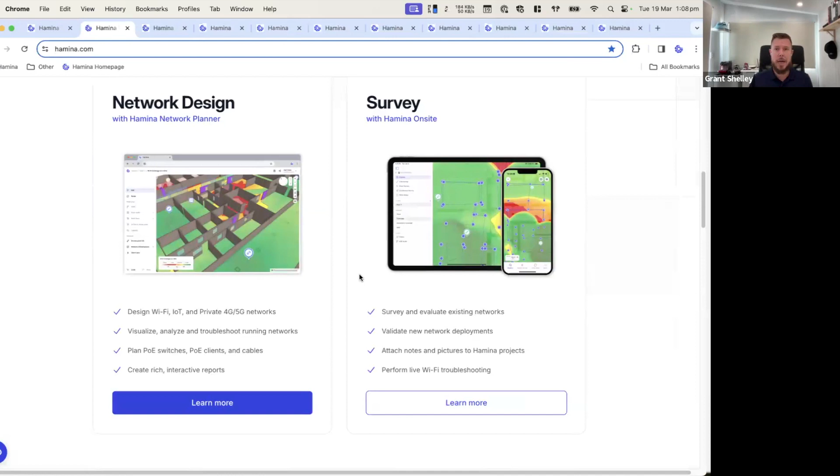All right, cool, let's get into the good stuff. We'll do just a quick little overview. If anyone is curious to learn a little bit more, literally everything's on the Hamina website, hamina.com, you can jump in there. There's little clips and videos that show you what the different products do, what you get with them. There's a quoting tool and all that kind of stuff if you want to look at prices.

We've got 2 products here, and then there's a sub product in the planner, which we'll start with. So basically Hamina Network Planner, as it states on the package name, is for all your network planning requirements fundamentally. It is a browser-based tool. I've got a whole bunch of tabs up here, so we'll jump into the planner in a minute. But basically you've got a standard version and a Planner Plus version. If we scroll down here, we'll show you what that looks like. One of the big things with the Planner is it's not like a traditional tool where you've got a DMG or an executable, it does run in a browser.

It runs incredibly well. I think a lot of people are surprised at how well it runs. It is purely cloud based, and even though I'm in Australia, I haven't really noticed any sort of latency issues or anything like that. So I don't imagine anyone else on this session is going to notice anything either.

If you're not 100% sure, you can actually sign up for a planner, just a standard light license is what it's called. That'll give you the option to use a predetermined number of walls and a certain number of access points - I think it was 4, as you were saying before, Haydn. But it gives you enough to get a bit of a play with it, to understand what the technology does. You can do cool things like move the AP around and see the propagation, the heat map change dynamically as well.

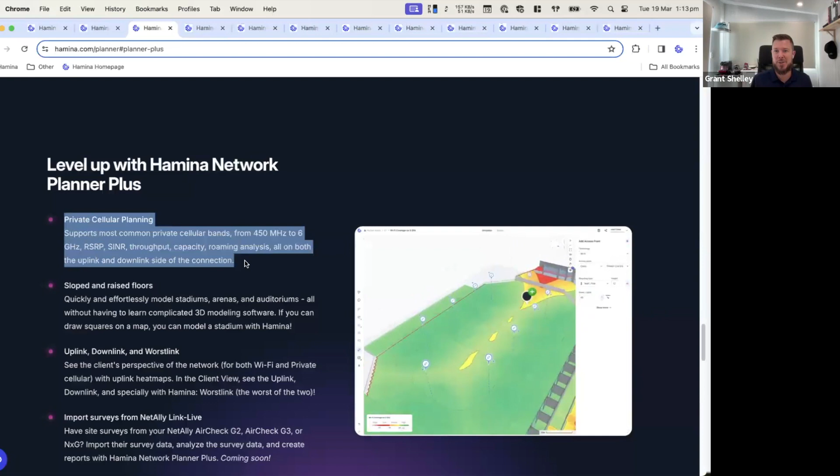Haydn, I'm sure you've been in plenty of examples where you've maybe been in a pinch, haven't had the right survey device, and needed to just do a quick scan with my MacBook, or I've got a G3 and I want to be able to do a quick scan on that. Being able to bring that into the tool would be pretty nice, right?

Yeah, definitely. I've had times where I've been out on site where I wasn't really expecting to need to do a survey, so I didn't have the survey tool, and to be able to use the internal adapter and still get some sort of heat map or data would be much better than - yes, I can use Adrian Granados' tools like Wi-Fi Explorer and that - but I still don't get the ability to get some sort of heat map if I do have to, in a pinch, give internal or external people a bit of a view of what's going on.

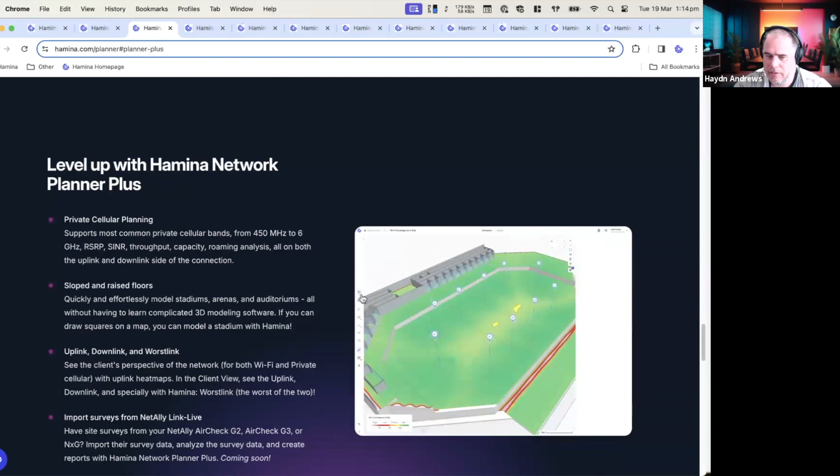And quite often, like you said with NetAlly, quite often I've got the G2 or G3 for potentially more the spot checks where I was just going out to check something, but the ability to feed that data in is going to be awesome. Yeah.

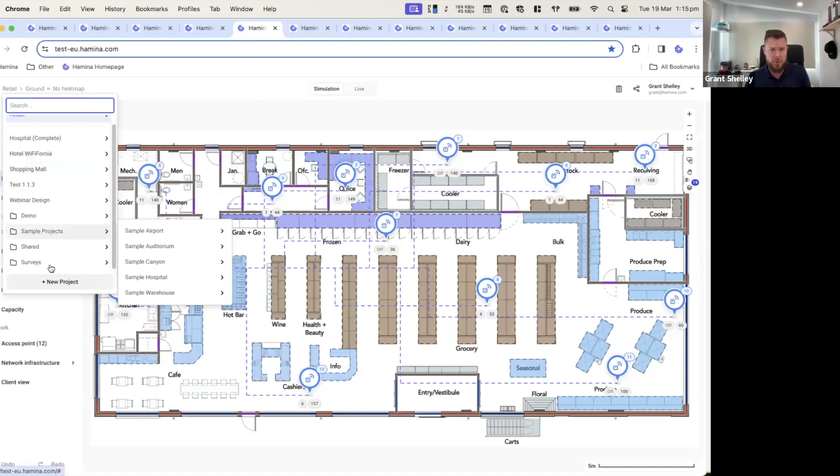And then let's jump into the tool. So the first thing you'll notice, I've got all my different projects here. I'm going to start and just create a new project from scratch. I think we were talking before about what are we going to start with - I've just sort of landed on a hotel environment. And so you'll see here, we've got the environment here. Basically, if you determine, depending on the environment, you can basically start placing APs based on the environment, and the software will do a pretty good job of giving you the right propagation without having to actually add any walls or anything like that.

But of course, if you do want to, if you do start to add walls and things like that in there, then basically the software will revert to free space path loss instead.

So you just need to drag and drop a floor plan in. I'm going to drag and drop a PDF into this one, and it'll take a minute. You can see it's in the middle of an upload here, having a think about it, so it shouldn't take too long. I should note this is a multi-story PDF as well.

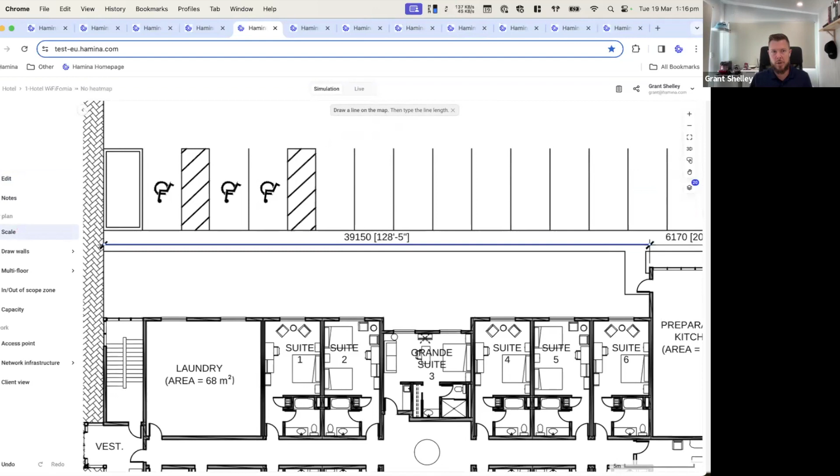First thing we're going to have to do is add a scale, so I can just zoom in here, scroll in with my mouse, click, and then we've got a 39 meter thing, right? Pretty straightforward. Now I can go in and just do the manual wall drawing. I've got a whole bunch of walls here, and I can add or modify walls if I want as well.

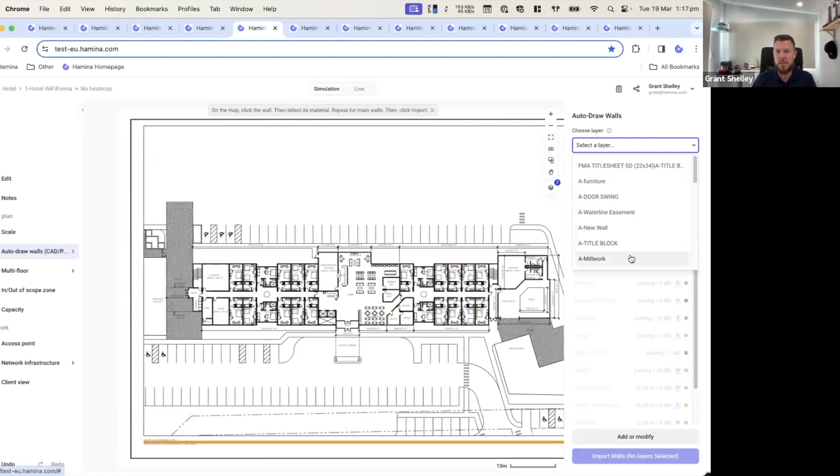But because it's a PDF, I can actually select the layering. I'm sure a lot of people have maybe seen something like this before. I can scroll through on the right-hand side and see all the different bits and pieces, or I can zoom in and click on some of this stuff. So I've got furniture, and I might just assign the furniture as the cubicle layer, for example. There's not really a right or wrong way to do it.

We can go through here and apply some of these, and you can sort of see as I define the different wall materials, they're highlighted in purple, and then the ones I'm actually going to change are highlighted in blue. So we'll go through here, and we've got just drywall.

There's only a couple more we need to do here. So we'll do some windows. Don't need to do any parking lots. Window.

We've got things like furniture and sinks and stuff like that, so fixtures. We've got the windows here, we can apply that as an actual window. Actually, we might want to make that a tinted window.

Now, the reason it matters whether I just set it as glass or as a window is that it will actually display as a window with a brick or concrete facade top and bottom as well, as opposed to if I just do glass, it'll be top to bottom, like a 2.4 meter high pane of glass. It may not be obvious in the 2D view, but when we switch into 3D, you'll actually be able to see the window with the other building materials around it, which is quite nice.

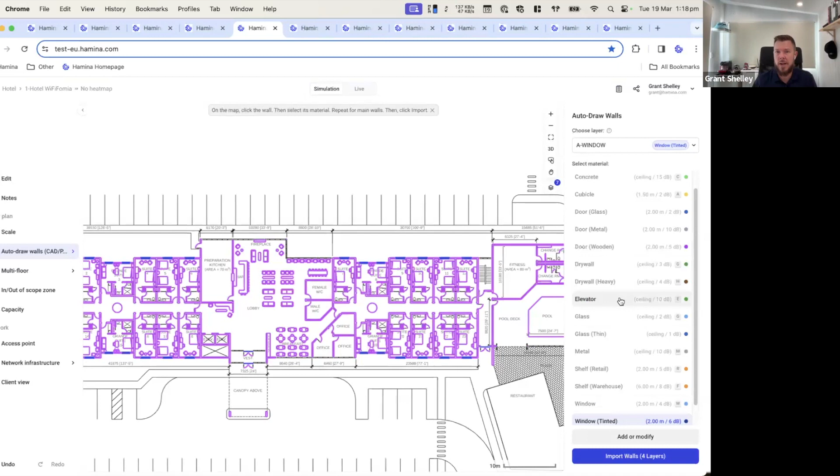And then we've got another entry for the door here, which again we can just apply as a wooden door. Now that looks pretty good to me. I think we've got this other one here - we've got the glazed glass.

So this one here, what I'm going to do is modify the glass itself. We go in here, select glass, duplicate that, and I'm just going to call this glazed. I'm going to double the attenuation, and then I might give it a green color. You can sort of see here, transparent in 3D - yes, I want that because it'll show up in the 3D view, show on the list, dynamic attenuation per frequency. I can do that, save, and then I've got glazed glass there as well, which I'll apply.

And then I just hit import, and it's going to import those 6 different wall materials. Does that pretty quick.

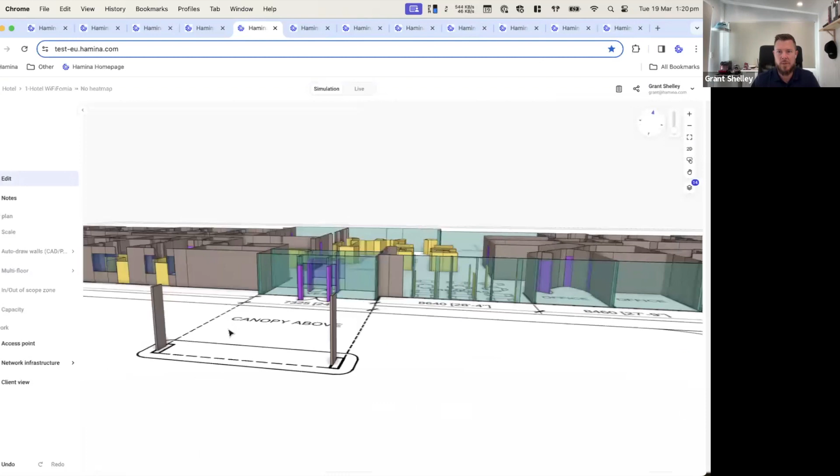All right, we go back to here, and we've got our design. It looks okay, we've got a little bit of color there, but once we go into actual 3D mode, you can see it looks a lot more impressive, which is quite nice.

Next step is just defining the zone, so what's in and out of scope. Again, this is all pretty straightforward stuff.

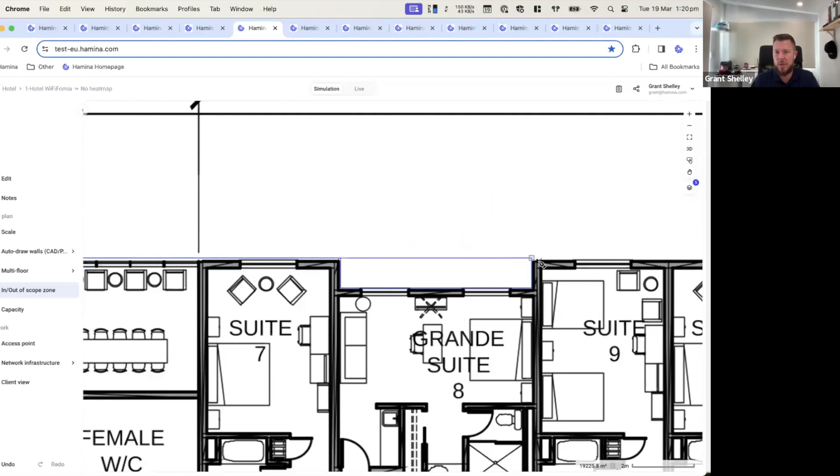Right, what you'll see here is that in Hamina, everything locks. So if I move the mouse cursor up, it locks to that other click point, which really helps when I'm going through here. It automatically locks to that point again, taking the guesswork out of having to click and do any manual work. It really streamlines it.

It's one of those things where Haydn and Michael, I'm sure you guys have done some manual plan stuff before. If there's any part of the software that can help streamline these types of things, which are often pretty tedious and a little bit boring, then you're all for it.

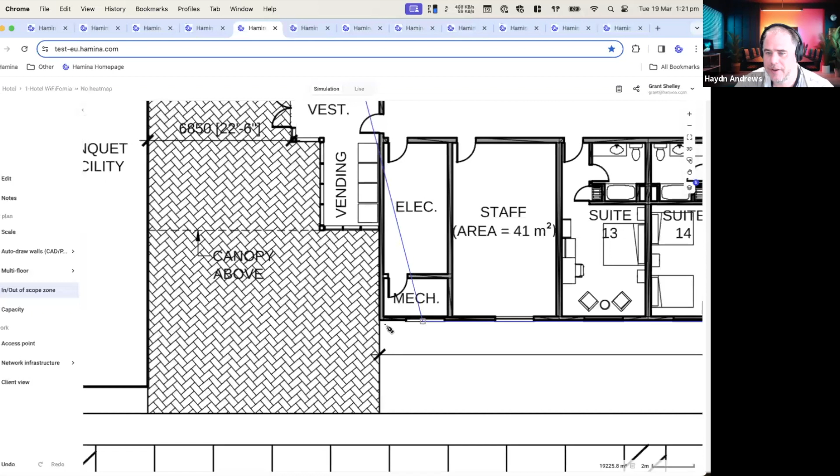Yeah, definitely, Grant. And the other one is, I can't remember what key it is because I'm using an external keyboard on a Mac and can't remember how everything's mapped, but basically you can press a button, and if you don't want it to snap to things, it won't snap to the lines, which comes in handy.

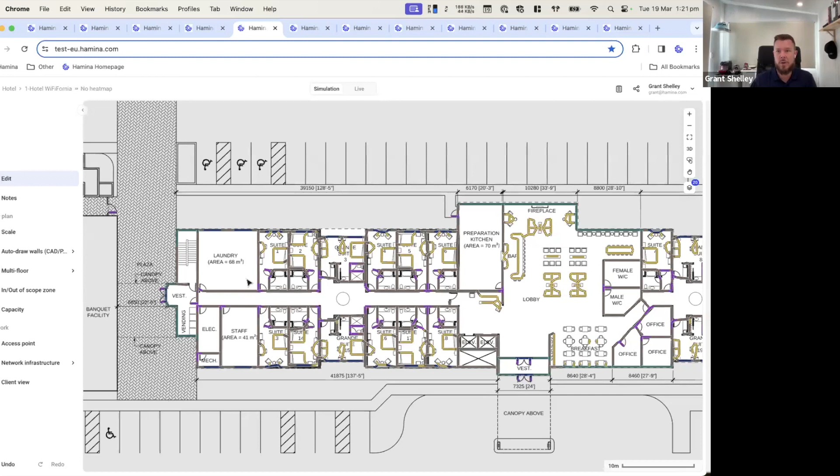Probably come in more handy in one of the demos you've got coming up, where it's got circular walls, where you don't necessarily want it to snap to anything because it's not straight. Yeah, absolutely. You can hold down command and get free reign rather than the snap angles if you want as well. So again, you've got that control over it.

All right, so now we've defined the area. We can basically start to go through with our AP style deployment. We can go through here. We've got Aruba, just at the top there.

Now, one of the other things we can do is, yes, everything is in 3D, but we've also got the 3D antenna view as well, which I find is really, really handy. You can see here, it depends on the AP type as well, which is quite nice.

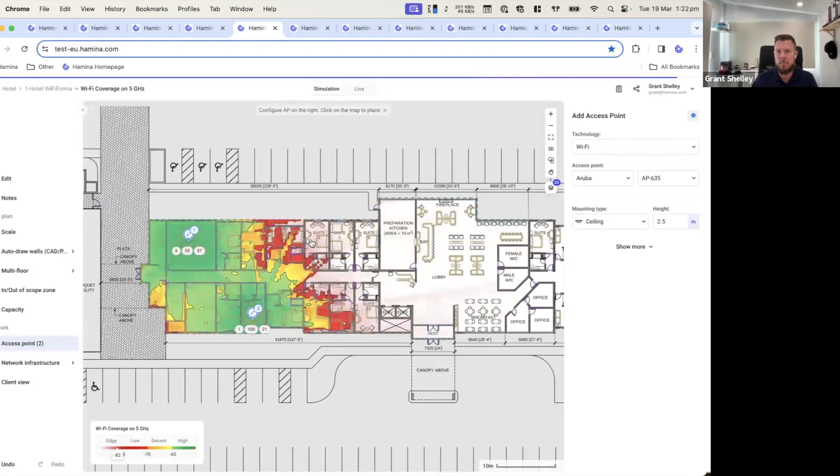So we can go through and pick our AP type. And then once we place the AP, it'll switch our coverage on. But then we can move that AP around, which is quite dynamic as well if we want, or we can just start clicking the other access points in the environment.

Right, and I think this is probably the more fun and satisfying part. For sure. And then we could do something here where, maybe for the pool area, we put an AP here that needs an external antenna.

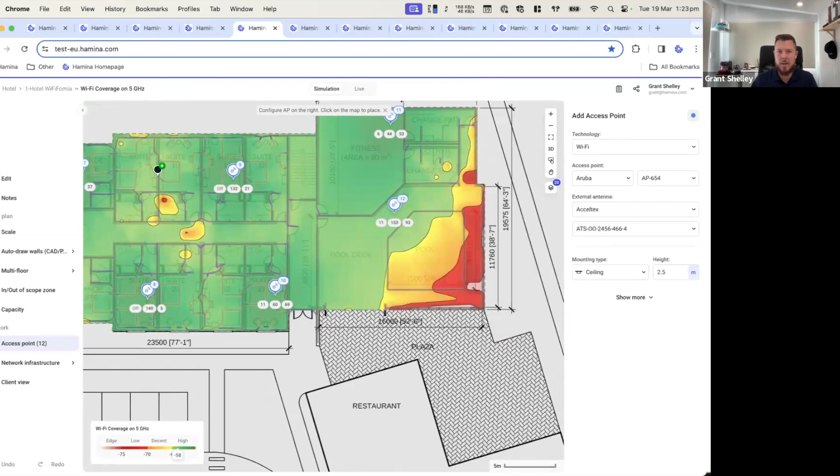And then maybe we choose the first antenna here. We click and drag and we can reorientate the antenna, so we've got a bit of pool coverage as well. So you can sip a mojito and still be on your phone with full coverage. And then again, we zoom out and we've got our initial design done there.

We do have a couple of visualizations as well, so we've got 2.4, 5, and 6 gigahertz. We've got our 3 channels there as well. The channel planning in Hamina is automatic, which is quite nice. Now you can go into a bit more detail here.

So you can disable unnecessary interfering radios. You've got some toggles there, automatic channel width as well, right? And you'll see here, because the regulatory domain was set to Australia, it did get the right channels, so we've just got the UNII-5 channels enabled as well.

And then off we go, and we'll get a little bit of an update there, which is quite nice. So I kind of like the philosophy of going as wide as we can until we can't, and then we can shrink it down. But then, of course, if the customer requires a narrower channel, we can force that as well.

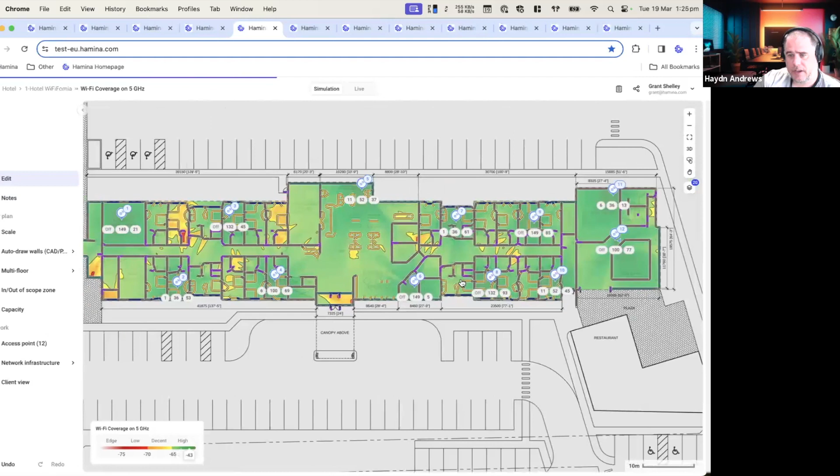That automatic channel planning, I've used that a bit to actually investigate, as I say, going the widest you can. I've found it works really well where you just keep dropping APs and watch the channel width slowly drop down in the tool.

So it's useful to get an idea of how wide I can go, so then I can marry up my network design to match what's actually feasible. There's no point trying to tell the wireless network to do 160 megahertz channels if it's just going to kill my system. And I've seen a few of the vendors, the best functionality doesn't always result in the best being deployed.

Look, I haven't run into any problems with it, but of course I work at Hamina. I'm not out in the field doing this sort of stuff, but I have put together some pretty large projects and haven't really run into any issues there. I'm not talking so much from the Hamina side, I'm talking more about using Hamina on that best channel plan to see what I can get, then I can adjust what I'm going to actually get on my wireless vendor's configuration.

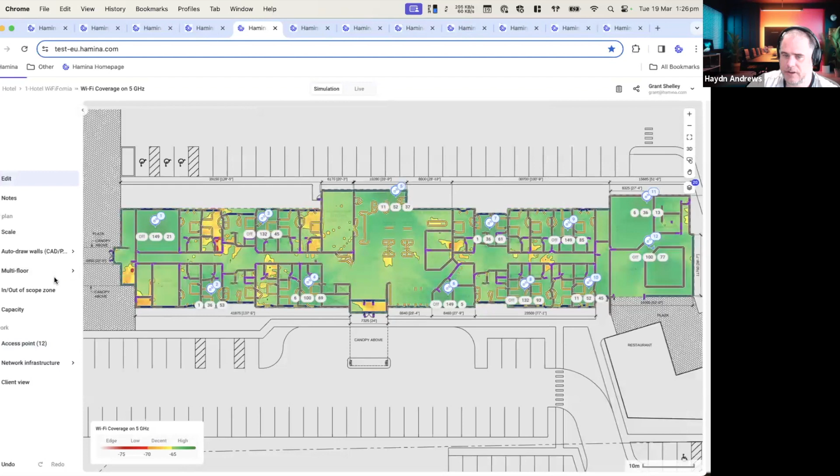I've seen some of the different wireless vendors, the functionality of best isn't always the best. So if I can look at it and go, well, there's no way that I can get 80 megahertz wide channels, but I can get 40 for this design, I'll hard limit it at 40 on the network side.

Those antenna plots that you see when you hover over, for anyone who's had to go and find those, sometimes they can be really difficult to track down. It's actually really convenient having it sitting within the tool, so you can get a quick visualization of what that antenna or access point's pattern actually is.

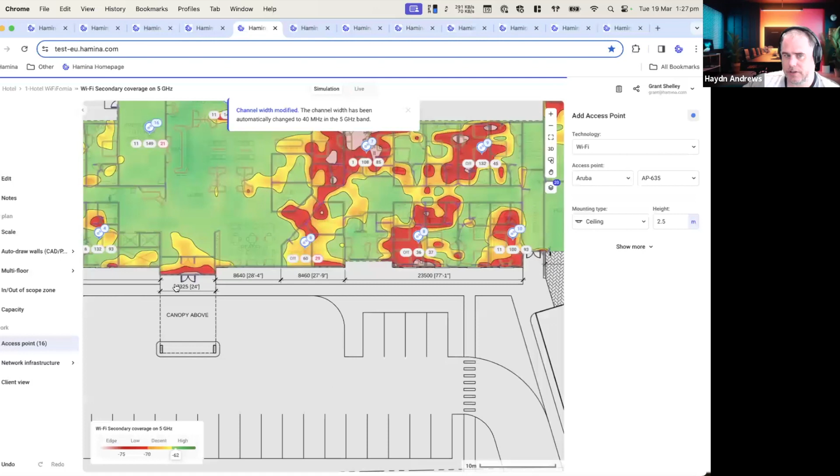Having it all there is a bit of a time saver. The other thing on that antenna pattern, having that 3D view is fantastic, especially when you're first starting in wireless. Trying to decipher the polar images is a mission and a half. Having a view that shows that it's massive and then it goes really narrow makes it a lot easier.

Or even to go, well, does it go out or does it go up? I've struggled with that in the past. You'll see people post on LinkedIn or something trying to understand as well. It's a nice little reference to be able to look at that, which I find quite handy.

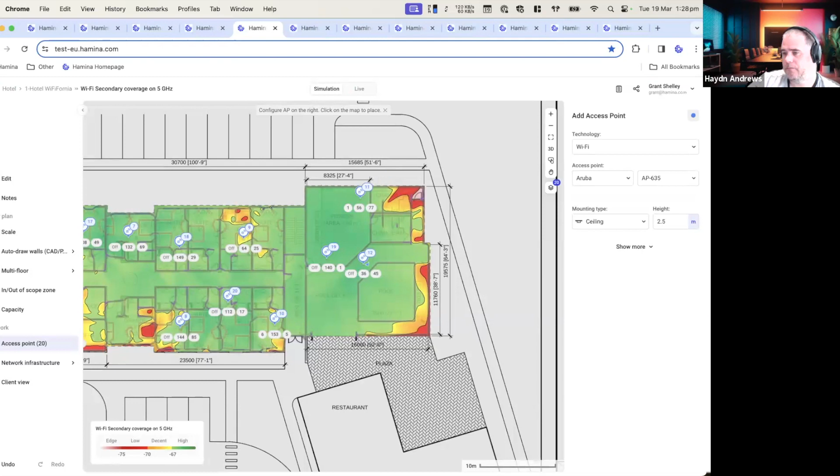We just had a couple of questions pop into the question and answer. The first one from Anonymous is, how many AP models do we have in the database? I realistically haven't found one that I've used out of the main vendors that's not there.

Correct me if I'm wrong, Grant, I believe there was something, if you've got the pro version, where there was an ability to basically work with Hamina to get an access point added. Is that still the case, or was that the beta-ish type era? I think that was a little while ago.

So if you want an AP added, it's generally a matter of send an email to support@hamina.com and we can get it added in. It's probably not about the number that we've got, because no one's deploying AC Wave 1 APs anymore. It's more about what are the relevant APs that you're seeing in the field, or that you're looking to deploy into the field.

So I haven't come across any, when customers ask us, hey, just checking, have you got this, have you got that? We do put them in the release notes as well. Joel's pretty good with putting what models we've got in there, what external antennas we're adding in as well. And we've got a really good relationship with the AP vendors to make sure we get them added in. So I'd be surprised if we didn't have an AP make or model that wasn't in there.

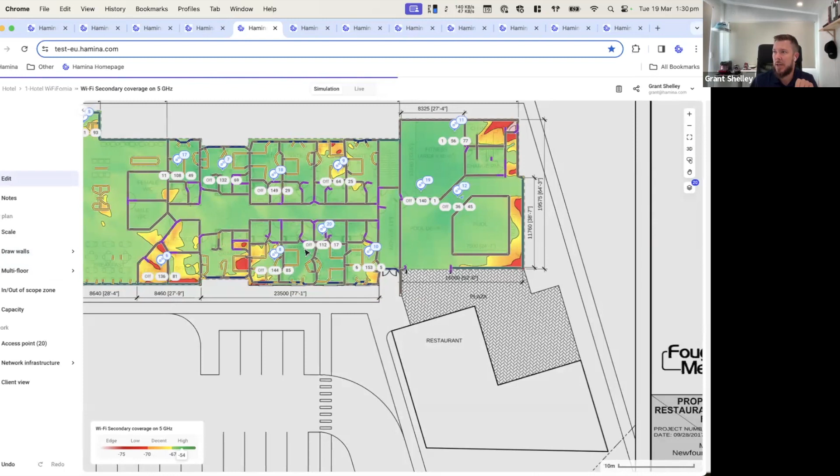And someone's asking about automatic AP placement, suggestion per floor or building. Not at this stage, but the fact that the placement is so fast. I'm not sure if we saw what I did before, but if I need to have secondary coverage, which is a pretty common requirement these days, I think I can see Michael nodding there.

That's a pretty good indicator for placement. A lot of the time when we're going through the automated process, at least what I've found, is you're generally having to section off areas and say, look, we can't place here, we can't place there. I've sort of just placed wherever, but I know I'm probably not going to place an AP in that stairwell unless it's absolutely critical, because of the cost, and it's almost a Faraday cage since it's probably double concrete and things like that.

And as you get further down here, you've got bathrooms which look to be a really good place to put an AP, because we've got this big wide area. But sometimes that's not necessarily going to be the case, same with change rooms and stuff like that. So the manual placement I find does the trick. That's my background, that's my preference.

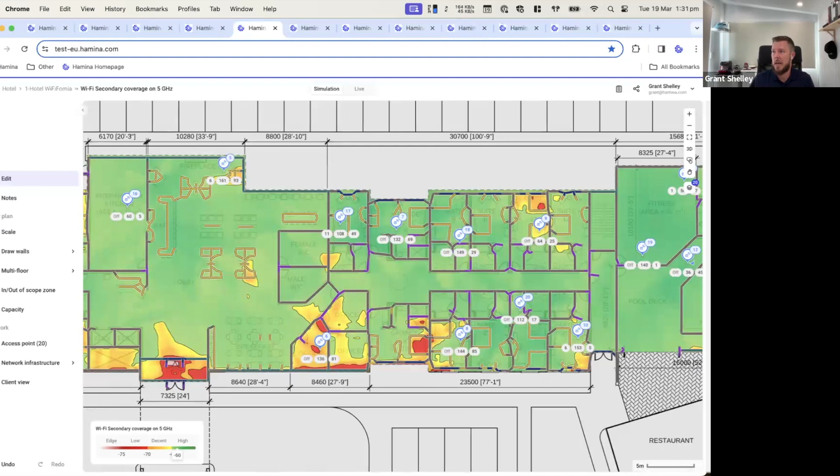And we will get into the capacity planning in a minute too. So now that's our initial design. We've got the placement in there, we've got our 3D view. We can switch back, and we can also relook at...

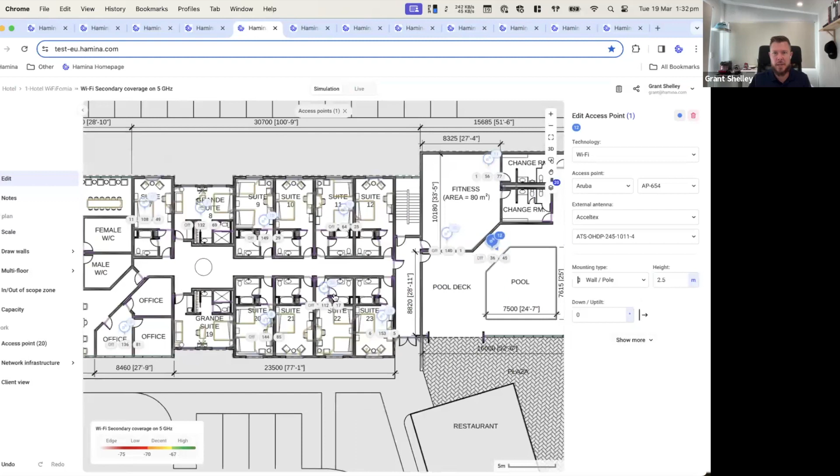The access point here - so what we might do is go back to primary coverage of the AP. We might mount this at 6 meters high, and you can see that changes a little bit. Then we might give that a 45-degree down tilt, which is referenced there, just to change that. And since it's an Aruba AP, we'll make it orange as well.

So now visually we can see that the external antenna AP is a different color. Now we can also switch things on and off - we've got the AP labels, we can switch those off. We can switch off the channels if we don't really care about those, and things like that. Then if we go into here, we'll switch off the visualization, and we'll have a look at multi-floor.

When I imported this PDF, there was floor 1, we had floor 2, which we've got here, and then we've also got floor 3, which we've got here.

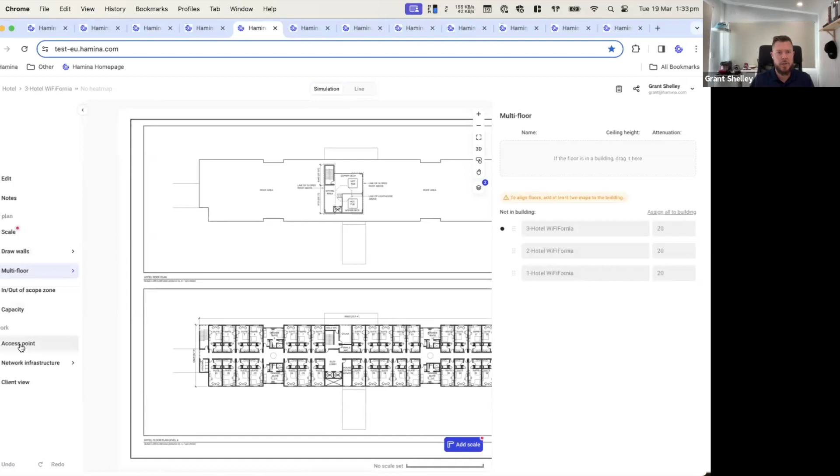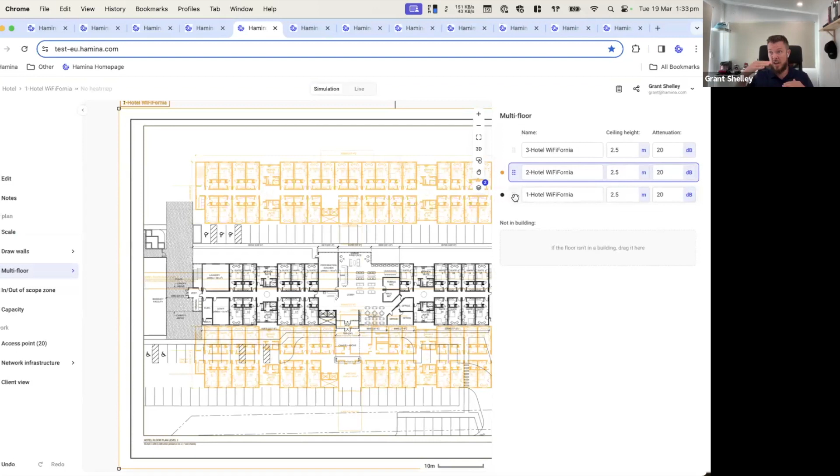Now what I can do is go back to floor 1, we can go into multi-floor, and what we can do is click and drag these floors in. So the way that we do the multi-floor, like a 3D building with the 2D floor plans, is we just line up the different layers.

This is pretty straightforward because we can actually see where the elevator is here, and we can pretty much line that up to be pixel perfect or thereabouts. That looks pretty good.

And then we can click on the 3rd floor here, so again we're aligning it with the 1st floor, and click and drag like that. So now that's done - the multi-floor is done.

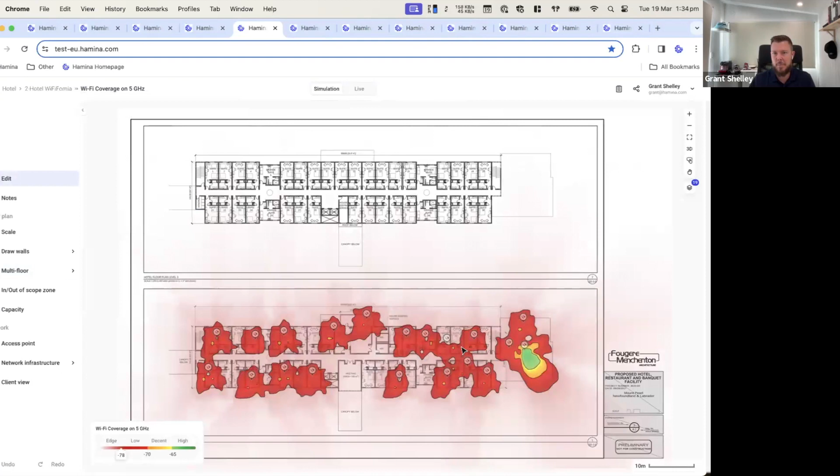If we went into the 2nd floor, for example, and we switch on the Wi-Fi heat map, you can actually see here we've got a bit of signal bleed, and it is actually telling us that the AP is on the floor below.

So, did you want to add anything there, Michael? Yeah, I was going to say, this is where you really discover just how good those maps that you've been provided actually are. When you start to scale them accurately, and then you try and overlay one over the top and realize that they're not accurate. So sometimes it's a really good point for you to then go back and get better maps, or work with what you've got. But yeah, that overlay really highlights where your maps are not up to scratch.

Yeah, probably the other one, use easy maps in Hamina. No, probably I'm kidding. We can do crazy, hand-drawn ones as well, which is probably what you're used to, Haydn. We can do that kind of stuff as well. But it does make it a little bit easier when they line up like that.

Yeah, I was going to say, probably the advantage of the way that the multi-floor works in Hamina is I don't have to scale every floor. Particularly this floor plan's probably not the best one for demoing this, but where the top floor is not able to use the external walls as anchor points - things like the stairs, being able to drop it on top, being able to move it to which stairs it actually is. I've had some where you might see two sets of staircases, but when you're switching between the two maps, you don't know whether it's the first and the middle one, or the middle one and the third one between first and ground floor.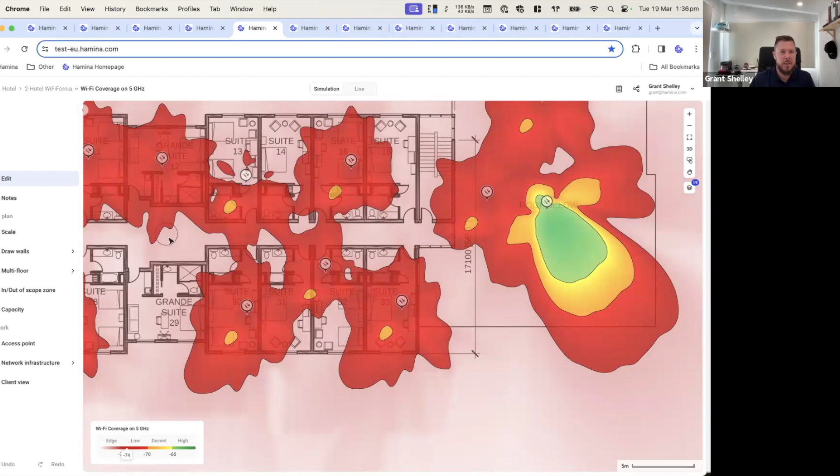Now, someone did ask how does the manual wall drawing work. If we want to do something like that, basically, if I just do this meeting area here, it's literally just click, click, click, and you'll see how it starts to snap in here. As I move up, you'll see how it snaps, and it's got that little line there, so it ensures everything's pixel perfect as I go around the map, which is quite nice.

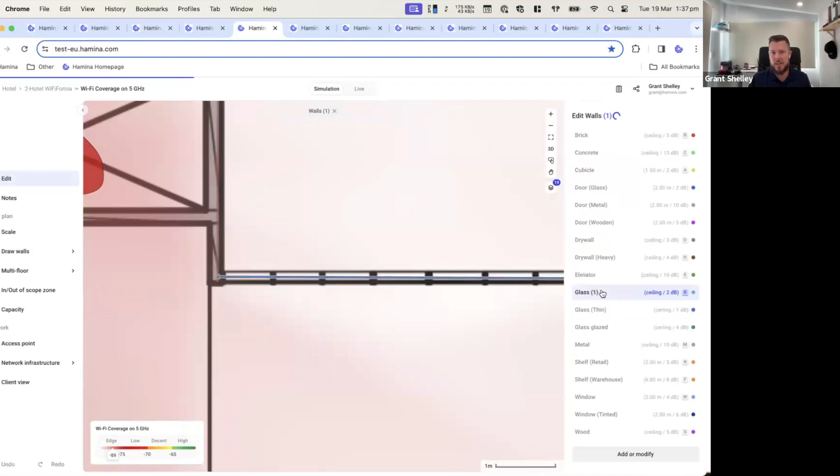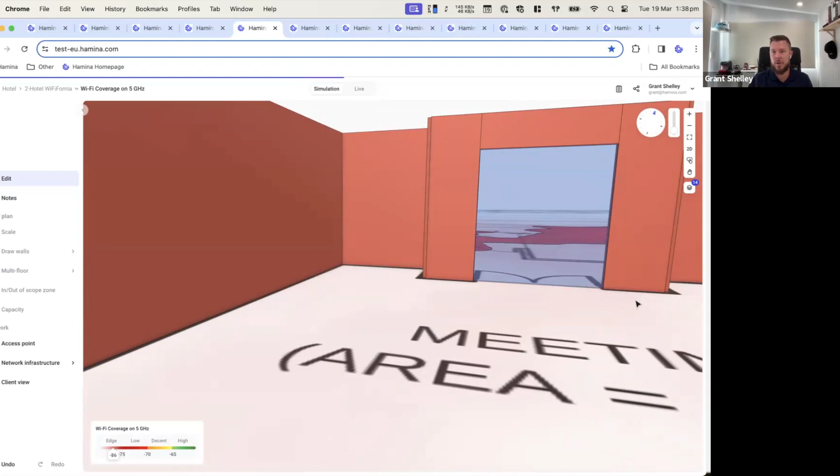We can go into here, and then off we go to there. Let's command click. And of course we can always change that to glass as well, and look at that in a 3D context. Or we can go back to here, click on this, and make this a wooden door, or maybe glass door is probably a bit better since we want to show the 3D. So you get the top section will basically take from the surrounding wall material, and you'll get that in there, which is quite cool as well.

There's a question about how you've been drawing it, and what happens if we get CAD files that are not correct in their layering. I basically do one of two ways. Either I just disregard the auto import and manually draw everything, if it's not a ridiculous floor plan or building, it's pretty straightforward and it's not going to take me long.

Just draw all the things. The other one is effectively import them all as drywall and then go click on the bits that I want to change, or import them as what's most prevalent on the floor plan. Nine times out of ten it's drywall, and then just go through and click on the walls that I want to change, just like how Grant just changed that door by clicking on that area and changing the wall type.

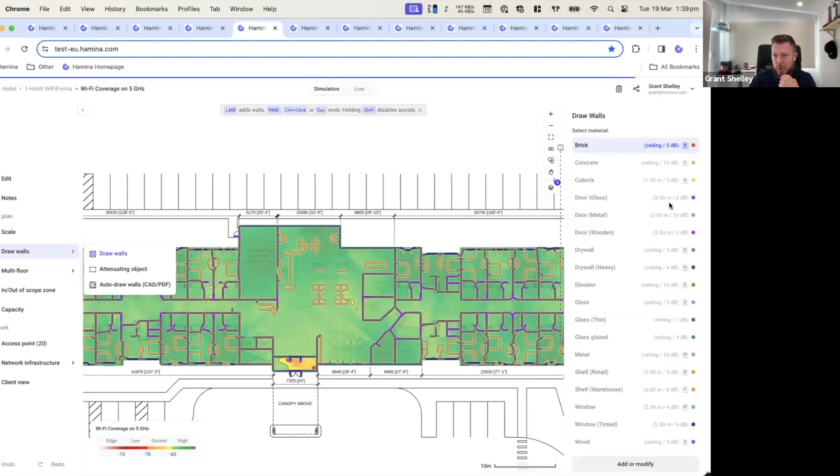They are also hotkeyed as well, so the lettering on the side here, like B, C, A - not all of them have got hotkeys, but you can add them. So you can modify, like the glass door, you can give it a shortcut key as well, which makes it a lot easier, especially if you select a whole bunch of walls and hit A, it'll change it to the cubicle, for example.

I did say on Twitter the other day, if you've got a Stream Deck, you can use the Stream Deck keys to hotkey your attenuation areas as well. Yeah, you can, absolutely can do that.

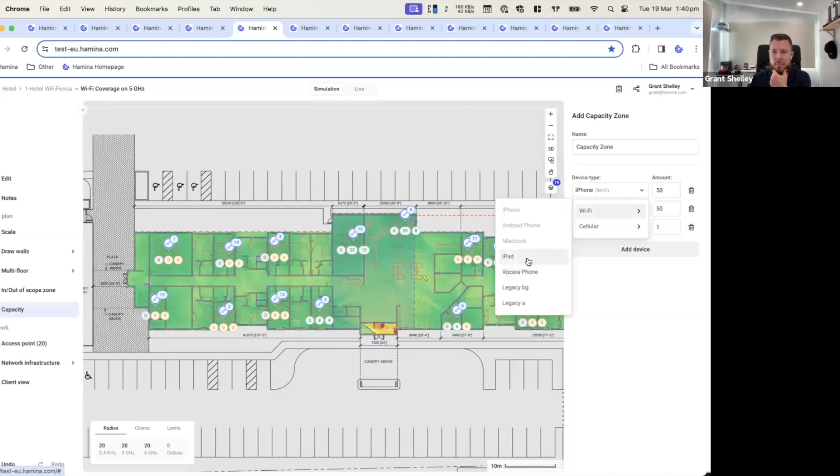Now, there was someone asking about capacity. Yes, we can define capacity zones. So we can define a capacity zone here, and then we can basically add in devices, depending on if we want cellular devices or Wi-Fi devices, and then what do we want to add. We've already got iPhone, Android, and MacBooks in there - those are the top three. Then you can add in iPads or legacy devices.

These same devices are what we've got for something like the client view, for example, where you can click on the map, and it's a bit of a roaming - what AP am I most likely going to be connected to - type of visualization, so to speak. But it's a lot more interactive. You can just click it on the map, and it will give you an idea of what's going on, depending on different areas, which is quite cool.

Now, of course, this is simulation. We do - we've got, for instance in this case, the iPhone deployment guide, so we are making some assumptions based on this design. But it does give you a pretty good indication, I think, of how the environment would operate.

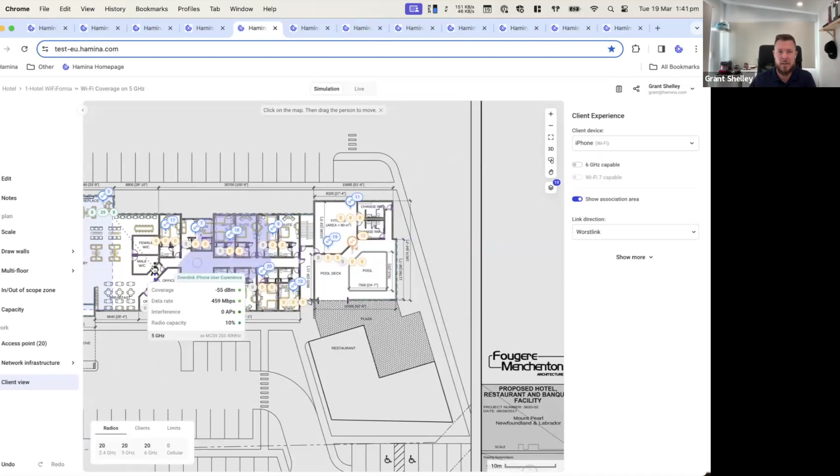Haydn, I'm sure you've probably made use of this, or liked what this feature represents.

Yeah, definitely. I've used this for a couple of things. One, probably the main one for when I'm doing designs, is to see what the roaming experience is going to actually be throughout that building. I'm trying to make sure the client roams to the access point it's going to, not roaming backwards. And the other one I've used it for, not so much my current role but in other verticals, is if we take Grant's design here and the typical way business likes to deploy it, where they don't care about the Wi-Fi and put the AP straight down the hallway, you can really show the difference of the client experience with this visualization - I don't roam until I get around the corner of the hallway, yet I've passed 6 access points. So it's a really handy feature to visualize why a design may not be the best design.

Yeah, and what I like about everything we've shown here is you do get the interactive version in the report as well, so hopefully we'll get to that. But the other question was, can I change what type of device it is?

Yes, we've got a couple of other devices in there, and you've got some other customizations you can do. You could go even further down the rabbit hole by forcing all the access points onto 2.4 gigahertz and all sorts of crazy stuff like that if you really wanted to. But in general, it's a good approach for what is most likely to happen in this type of environment. It's probably worth noting it also isn't purely based on signal strength - it's got the actual, I think they call it the green triangle of signal strength, RSSI, and whatever other magic the vendor decides to take into account for roaming.

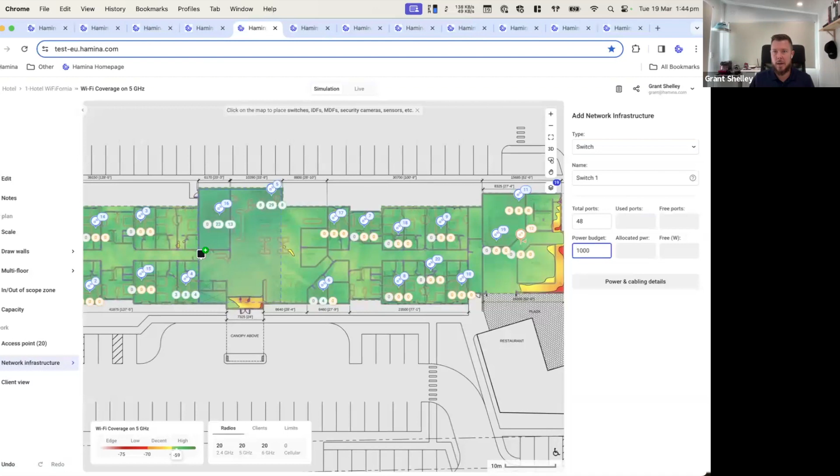So we can do MDF, IDF, switch, or router - pick what you want to do. We could do something like a 48 port, 1000 watt link budget power budget switch. We could put it in the electrical closet, which looks about right, like so. And the software will automatically hook up the nearest APs. We will get an exception for the APs over here due to distance.

And so then, if we wanted to, in the fitness area maybe in the corner there, we'll hook up another switch. And then we get this automated cabling of all the access points. In Hamina it does it all automatically, a bit similar to how the channel planning works as well.

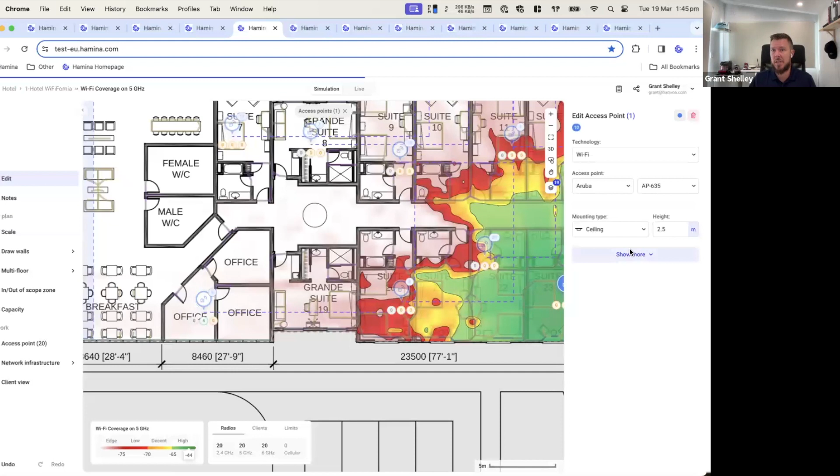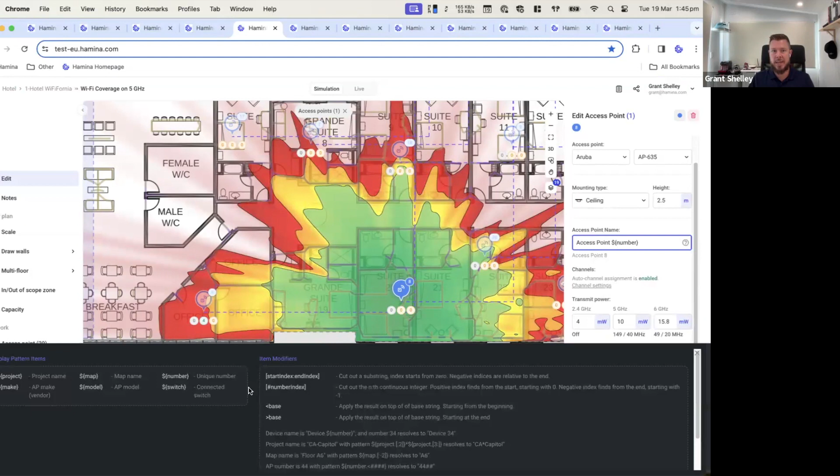But we can do things like, when we look at the individual AP, we can just Control A and select all the access points, and go through it if we want. But if we just select an individual AP in this instance, we can look at other bits and pieces like the mounting, the height, the AP name - we can change this as well. So we can add in project, make, model, things like that.

We can do the channels, transmit powers if it's got BLE. We can also look at things like the Ethernet - so we want the APs in this instance to just connect to the nearest PoE power source. But we can actually tell it, no, we want you to connect to switch 1 or switch 2. We can name those switches as well to make it a little bit easier. We can mesh it, or we can just not connect it at all for whatever reason. And then we also have the power budgets from the vendors in there, so we get a pretty realistic representation of what that all looks like.

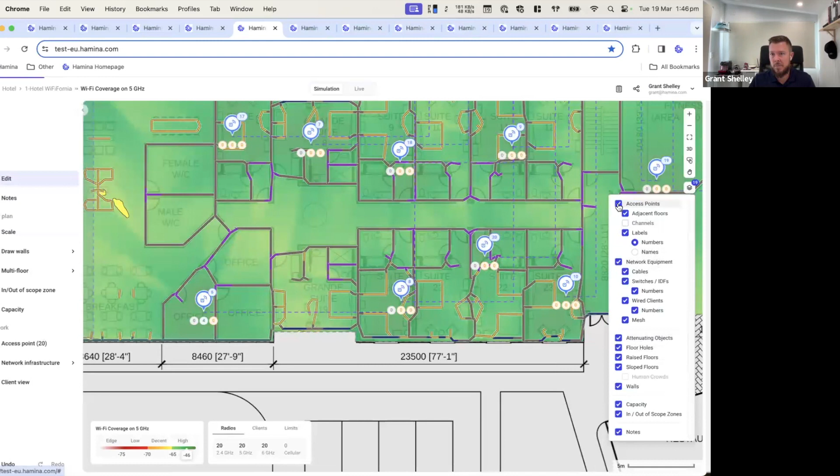Someone's asking about a network diagram. To be honest, what I would probably do is go through and do some of the layering that you've got available in here - you'd switch off things like the floors, things like that.

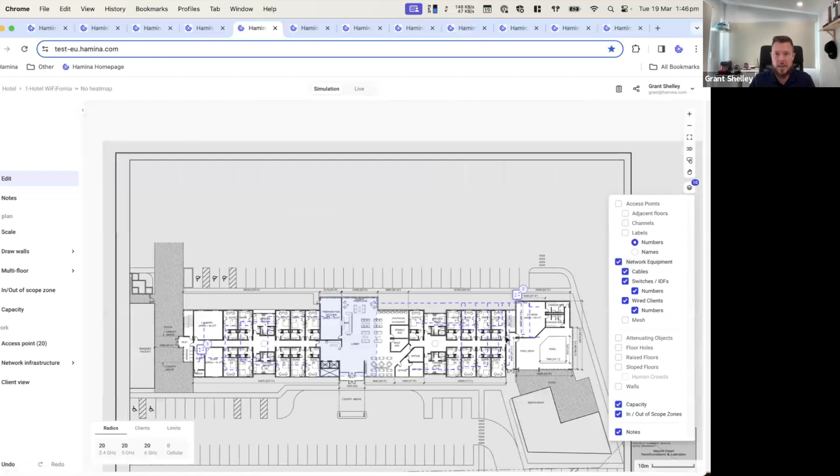You can do something like that. Now, the other cool thing you can do is, if that doesn't look clear, it's a little bit hard to see. What we can do is actually adjust things like the opacity of the design as well, so you can very clearly see where different elements are within the tool.

The remove colors is a feature I love. I love getting those floor plans where they've got green, blues, reds, all the colors that the signal generation's going to take, and I can't tell the difference. Literally, you can come in here and click on remove red, and boom, it's gone. I don't have to go over to Photoshop and work out how to get rid of one particular color. It's so much easier. So that's quite nice, I can remove the colors. These ones, it's very much black and white, but you can remove them as well, which is pretty handy.

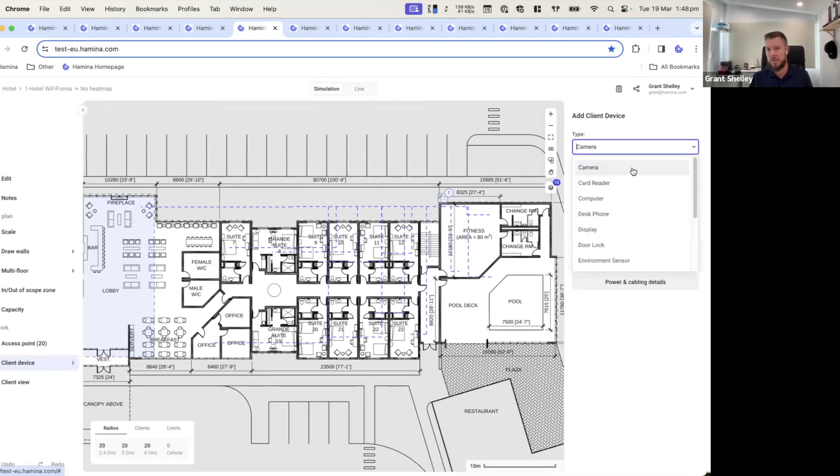Now, that's one example of the top to bottom design. I can add in additional infrastructure here. When we talk about client devices, these are wired client devices, for example, so you've got sensors, printers, door locks, and things like that in there. So for instance, if we're going to add a camera in, I can click a camera, I get a little camera icon here, and you'll see I've got a power budget, and it's running an Ethernet cable to the switch I've got off to the side as well. So we can do those type of things, you can really get into a lot of detail.

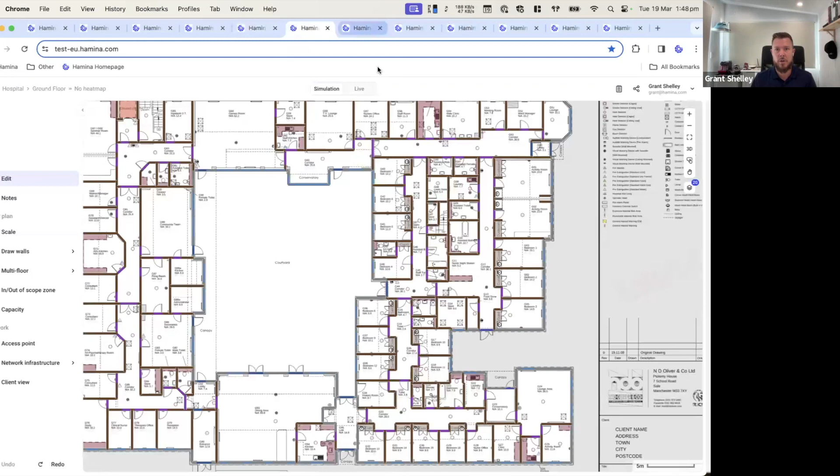I think in one of these I've got a report as well, eventually. Maybe not in this one, I've got it in another one. But there is a report that I've got in one of these as well.

So yeah, let's move on. I'm just looking at the time, and we are quickly running out of time here, really quickly. So what I'd like to do is show the survey app, I think that would be really handy for the folks that are here.

Now, we do have a Mac OS app as well, and so we've got that there. I've got my Nomad off to the side here, I'm just powering that up now. USB-C on the side, and I've got another USB-C for if I wanted to plug in like a power bank or something like that, which is quite handy.

What I'll do is I will connect and see if I can screen mirror this, and hopefully this will work. So you guys should be able to see this right now. All right, here we go.

At the moment, I'm in the Hamina Onsite app. I've got some options here. On the iOS device, I've got the ability to survey from a Nomad or a WLAN Pi. If I'm on the Mac OS version, I will also have the MacBook there available, so yes, I can do a survey on the MacBook.

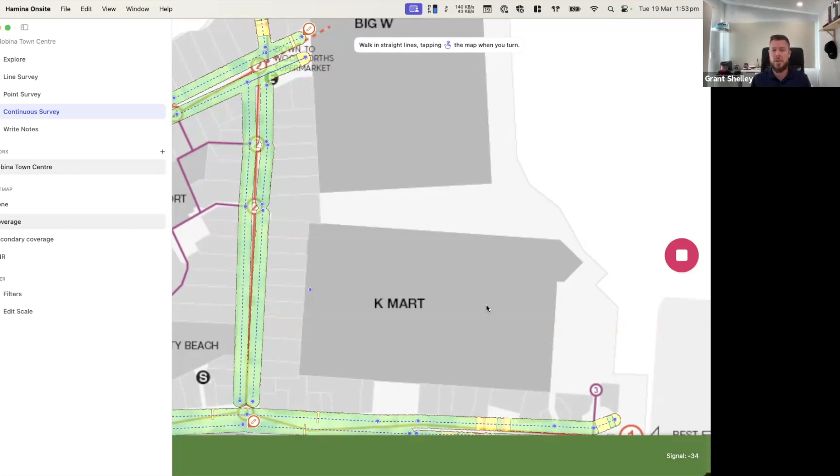Basically, from a survey perspective, you've got three different survey options. You've got a line survey, which is from one point to the other, you can see that up on the top there, so it's basically a start and a stop. It's pretty good when you know your destination, especially if you've got a lot of crowds, like in a large shopping center - that can be exactly what you need.

You've got a point survey, which is for smaller areas where you can only just squeeze in - you can just do a quick point survey. And then you've got a continuous survey where you're always capturing data, so you always need to be moving around the environment.

You've got the ability to write notes - text notes, picture notes, and you can change the icons and things like that as well. If you want, you can add floor plans in and scale them. You've got things like coverage, secondary coverage, and SNR, and you can filter things out like the access points.

Someone's asking, I think you're going to say, Haydn, do I need internet access? No, you don't. The nice thing is that the syncing happens.

It really happens in the background, so you can survey and sync at the same time. You can exit totally out of one project, go into another, and syncing will still be happening in the background as well. So we've built the product in a way where the functions the tool needs isn't going to get in your way.

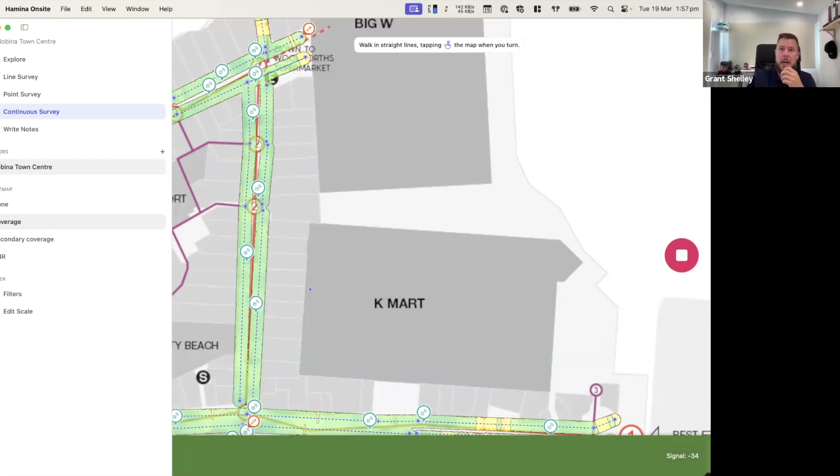One of the things I didn't necessarily show here is, even with the sharing, you can share projects to teams and things like that as well. I've got my top secret team, which is very, very secret - I think it's like UC and Joel and Jerry. But basically, if you've got a team of engineers internally, it's very easy to share it to them without too much hassle.

If we get back to here, this is what the survey looks like in a post-analysis world. That's that same survey, sort of what it looks like, depending on what you're looking to do there. You can highlight the individual APs, and we get all of the individual data there as well. Actually, I think this one here looks a little bit better because we've got things like the picture notes and things like that.

We can do things like add picture notes, we can change the icons as well - Pac-Man's probably my favorite one. We can delete things if we want to, we've got things like that. We can also change what the actual SSID was.

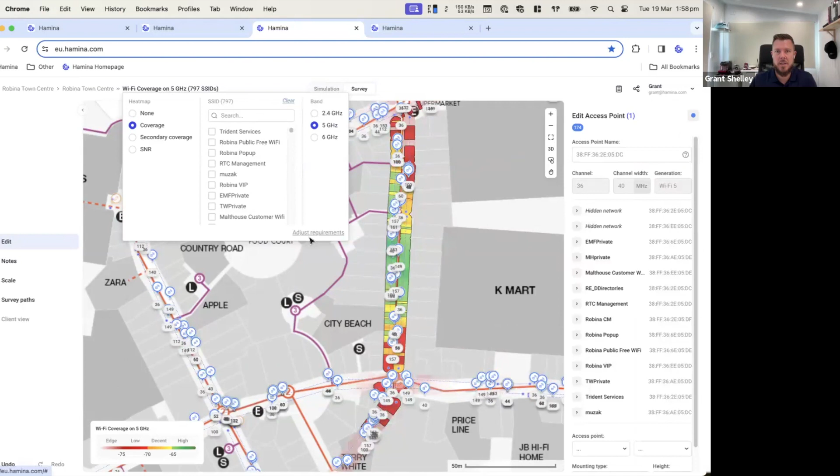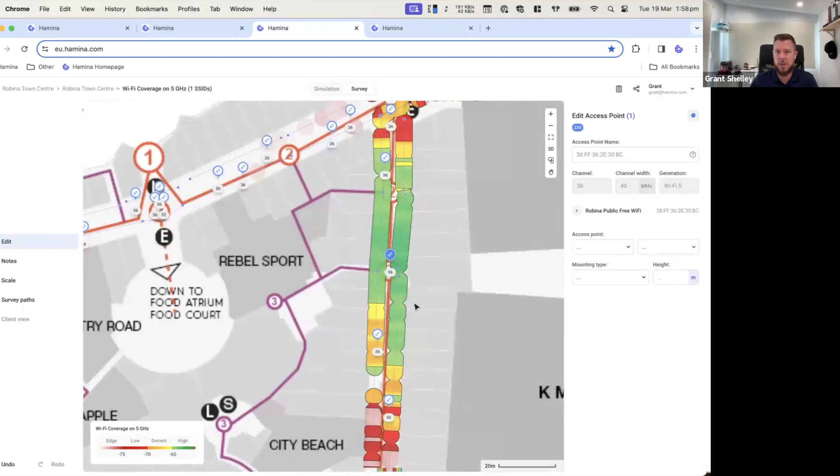So yes, we did find there was a lot more APs because it was a shopping center - just about every shop has got its own AP, or router, wireless router or something like that. But if we just look at the local infrastructure, we've got these APs that have got these coverage cells as such. Not all that great that they're all running on channel 36, but that just seems to be what they've landed on.

So maybe they need a little bit of Hamina in there as well. I actually did have a report somewhere.

Let me see if we can find the report that I put together. Someone did ask for a report, so I will bring one up. I must have accidentally killed it - oh sorry, this is the report here, actually.

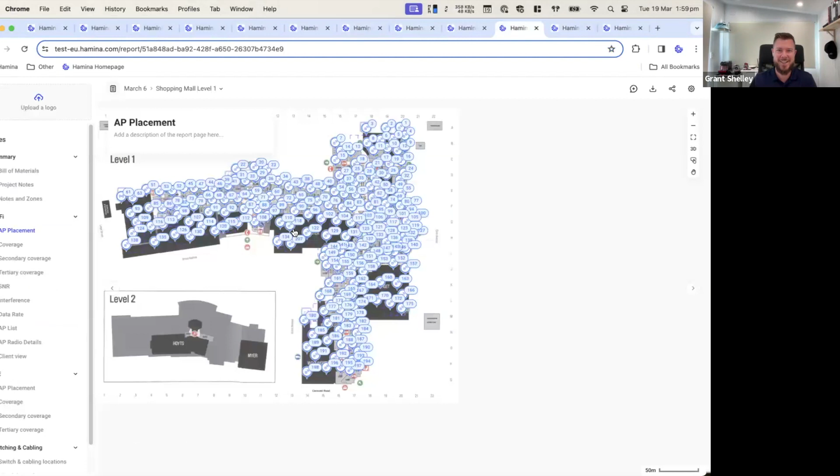And that's the problem - the reports look so similar to the actual real thing, and that's sort of the bonus. So yes, I can download this as a PDF, I can share this report, and again I can share that and add a password to it if I want as well.

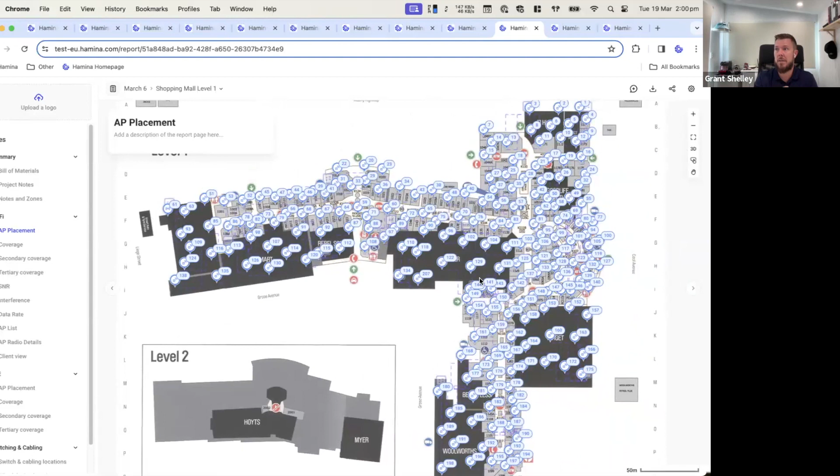But this is basically, regardless of user, what they'll be able to see. So whether I share it with Haydn and Michael, or with someone else that doesn't have a license, they will still be able to access this. They do not need a Hamina account to see it, but they can see things like the coverage, for example. They've still got the ability to go through and see different bits and pieces, like bill of materials.

They can go in and edit a bunch of these as well - they can change a lot of this stuff, switch locations, things like that as well.

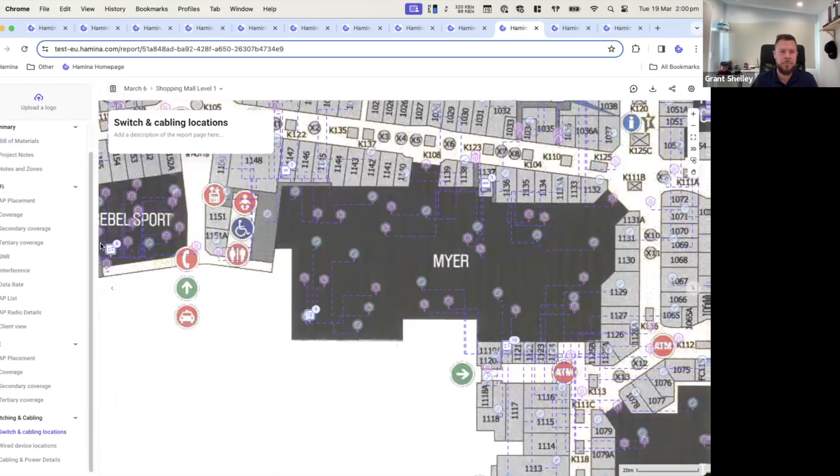Probably on the reports - I've come from a company that has that lovely thing where everything has to be a PDF. And I've come from the VAR land where I've delivered the PDF, and I can tell you, from coming from a VAR land where I send a PDF, 9 times out of 10 the customer doesn't understand it, and I've got to walk them through it.

And now being on the other side, receiving wireless designs quite often from integrators, I get it. If Grant clicks the coverage tab for a second - yep, up, coverage, Wi-Fi, yeah. I get this lovely plan, and it's like, well, everything's green, or everything's red, or everything's yellow. I don't have the best eye to be able to say, well, at that point, right where it's just a little blob of yellow, is that neg 60? Is that neg 65? Is that neg 70? To me it's somewhere in that decent range, of that little scale, it's down the bottom.

The ability now with this online report to just go in, zoom, move my mouse, zoom in, see what it actually looks like - that particular one, I've clicked on an AP. I've had a report come through that's been like over a gig in size because it details every single AP's coverage, with like 300 access points, and it's a 300-page PDF document, and it's just not user-friendly. The ability to effectively do this - I want to see what this AP or these two APs, what the coverage is - to be able to click on the report as an end user is fantastic. And then as a consumer of the report, I can go stick a comment on there.

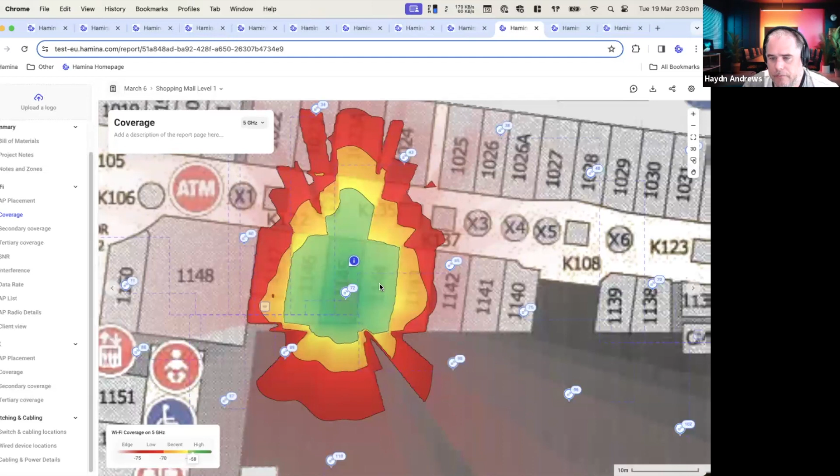As the person receiving the report, I can stick a comment there and say you cannot mount the AP in this room. Rather than going back and forth with the customer via email, I can type something like that, and the person on the other end gets a pop-up with where the message is. I don't have to say it's in room 1145, I think, don't put an AP in that room, and then spend the next 5 hours with the other guy trying to work out where that room actually is on a floor plan. Now they can just see my note straight away, so that collaborative side works really well.

And as Grant said, there are PDFs there because there are parts we still do need to get as a PDF, the lovely need to just store it in SharePoint for project's sake.

Builders quite often want a report with a different thing, and it's really easy to make a different report. I've found going between an installer report and another version, you literally just hide that section. I don't have to go create some other document to build my report.

It also does, in this case, a bill of materials report as well. You can put in your own custom project notes as well, which does pull through. You've got some logos and things like that you can add in there too, so there is a bit of customization in there.

There's definitely a lot more coming. Haydn, we've had some really good discussions around that as well.

There's a couple of comments in there about AP implementation, for on-site guys, versioning. Talking to Grant, Yusi and Joel, there is a big piece of work coming to revamp the reporting, to fill in a bunch of things that aren't quite there yet. But the advantage is it's the SaaS platform.

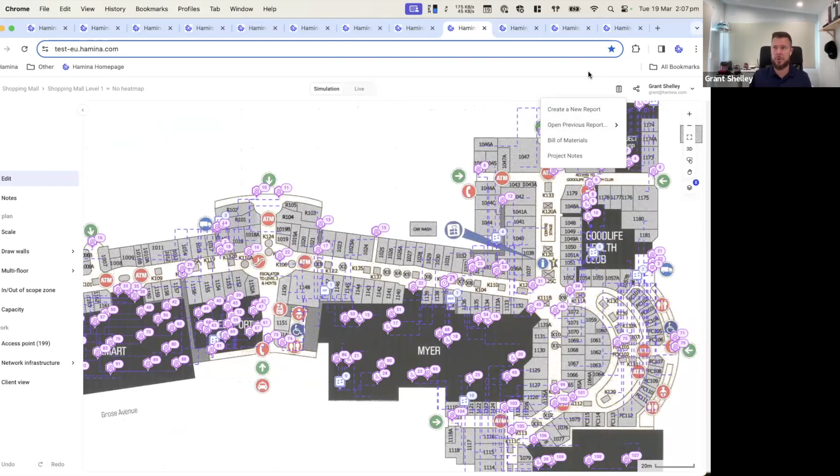I did just want to touch on, Mark was asking about the versioning on the reports. You do have different report versions each time if you want as well. Otherwise, at the moment we've got some templating stuff in there, but you can pull it from a previous version as well, so you can keep a bit of a track of that. But Haydn, I know we've talked about versioning on reports as well, so there'll be some movement there too.

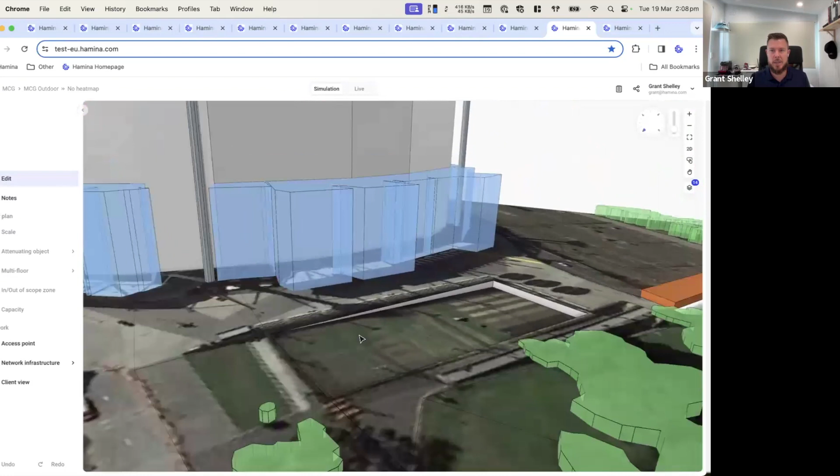I wanted to have a little fun and show some of the 3D modeling and what it's capable of. So I started building these stadium designs that I keep seeing - some of the other guys have done look really cool. I grabbed a Google Maps image of the MCG, and it looks kind of boring by itself, but then when you put it into 3D, it's pretty cool. You've got the cricket pitch area with elevated and sloped flooring, and this overpass as well, which I managed to draw in.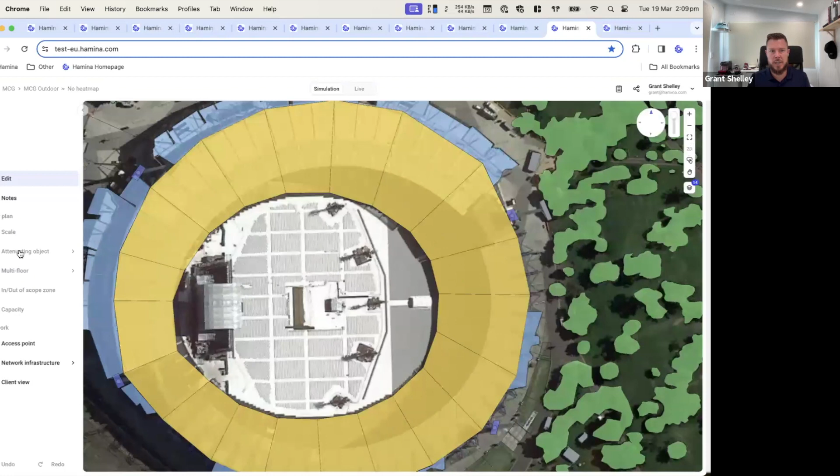This stuff seems like it would take a long time, but it's actually pretty straightforward to do. Literally, you've got raised floors and sloped floors, and that's really what it comes down to. It's all pretty straightforward - you can see we've got the lower height at 0 and the upper height at 65 meters. I don't know if that's 100% accurate, that's just what I did.

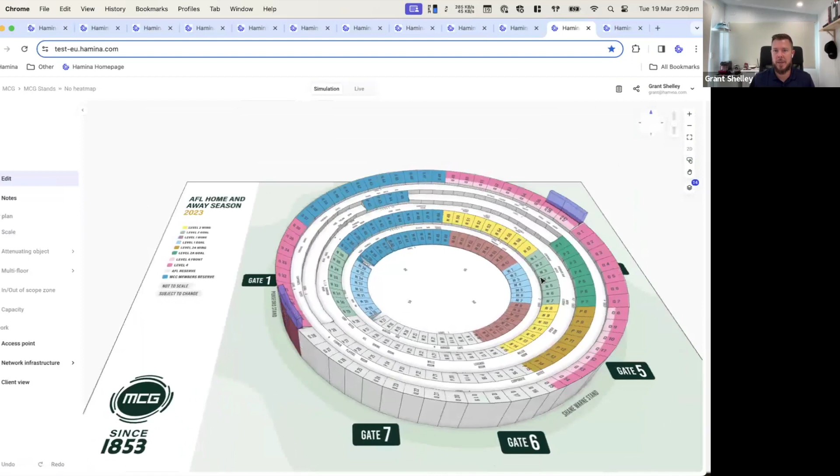If you go into the stands area - Haydn, we were looking at this before - that gives you an example of what you can do with the tiering. Again, this stuff isn't super difficult to do. It's just a lot of, if I zoom out and hit Control A, a lot of elevations on elevations, really. But the software does do a lot of it for us. If I click on one of those, lower height at 1 meter, upper height at 12.5 meters, we worked out the tiering with just a bit of drawing.

Yeah, I know everyone's probably thinking we do stadium designs quite often. Particularly in the US, it seems every second wireless engineer's got a stadium sitting in their backyard. Over here in Australia, there's 24 stadiums that maybe get wireless refreshed once every 10 years if they're lucky, or if the Olympics come along.

This functionality - I've done quite a bit of work in higher ed lecture theatres - is fantastic. There was nothing worse than sticking an AP at 3 meters in height, but because of the tiered seating, it wasn't hitting the area I wanted, or it was way too high. Being able to see how it's going to work in those lecture theatres that are maybe just one room inside a big building came in really handy.

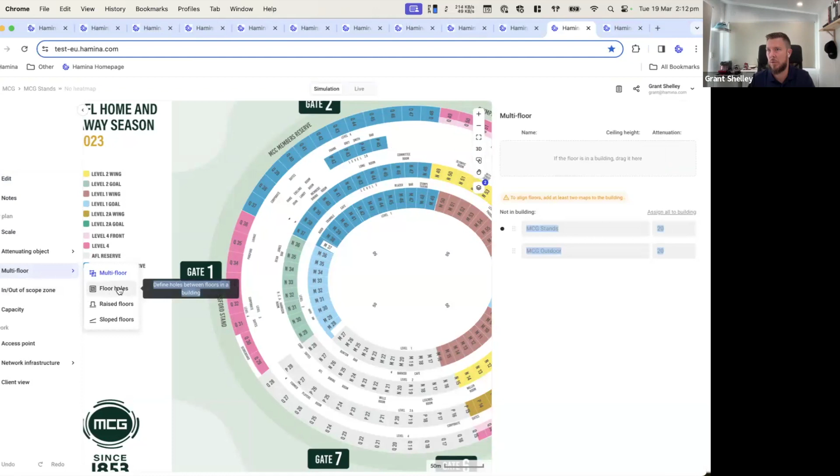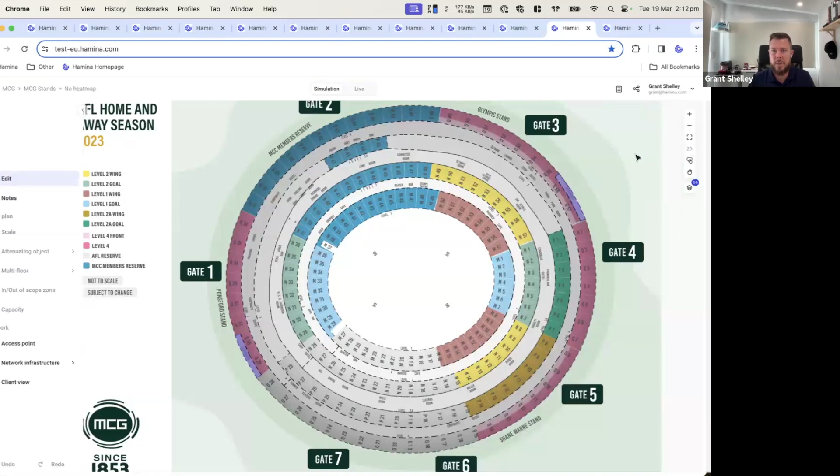Yeah, and there was someone asking about shopping centers, with the big open atriums - how do we deal with that? We actually literally have a floor hole for that type of stuff. But you're 100% right, Haydn, it's for this kind of thing - let me get rid of that. You do have the ability to mount an access point on this walkway here and blast it up into the crowd.

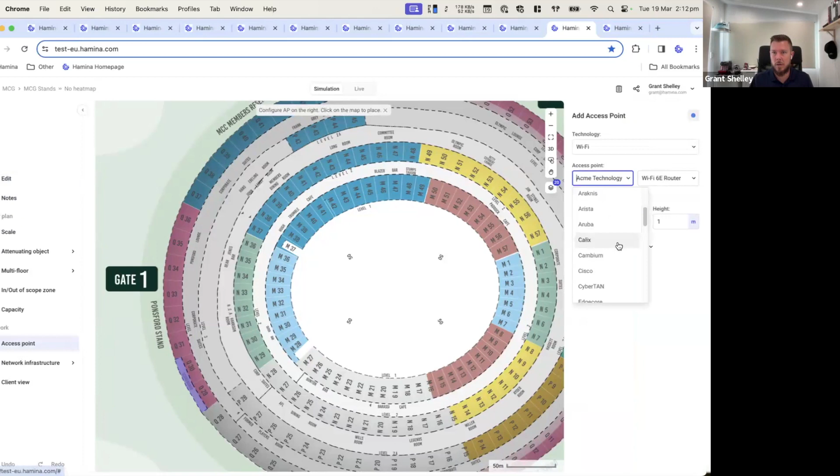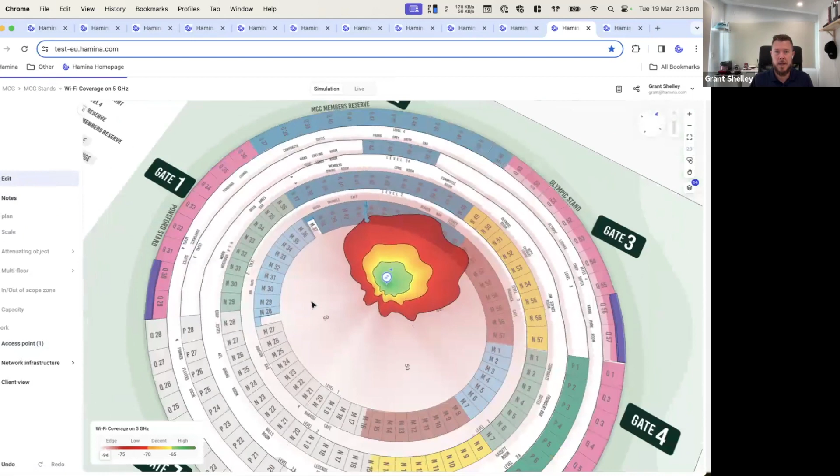I haven't added any of that sort of stuff in there, but this was more just to show off what is possible with the 3D engine - when you're looking at it in a 2D fashion, for lack of a better term, it is very flat, but it does help you visualize it a lot better. When you place an access point in there - I'll throw something like an AP in - you can still view it, grab it and move it around, which is kind of cool. You can see how it's going to interact, which is kind of cool as well.

I'm doing one at the moment for a mega church in Southeast Asia, and the ability to model what it looks like is great, because we've got 8.5, 9 meter ceilings, but you can see, okay, if I'm on raised seating, I'm only 3 meters away from the access point. So that's kind of nice to visualize - what is the impact of that going to be?

The other thing that was a little less obvious to me, but became obvious when I started doing it in 3D, was there were times where I wasn't orienting the antennas correctly while looking at the 2D design, which became immediately obvious when I was looking at it in 3D. So that was quite a useful feature as well.

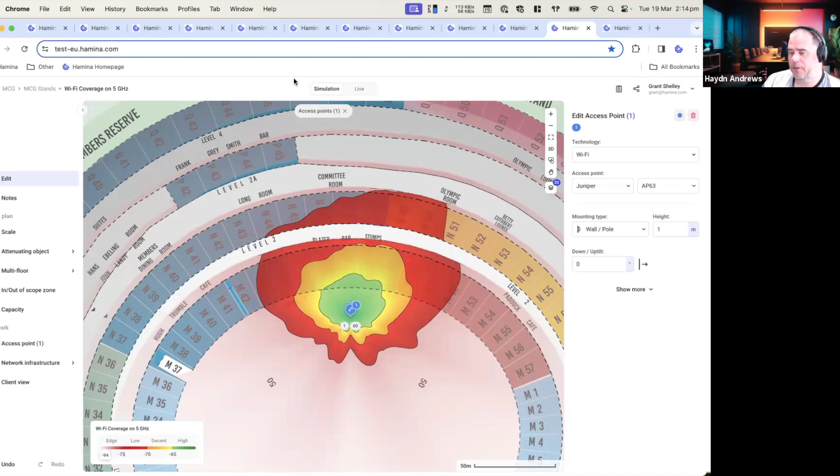I suppose the other one which probably comes into play with the 3D modeling that would be really helpful is mining - working in the mining environment. So the big open cuts, the ability to see when you've got a truck down in the bottom of the pit, can it actually reach? There is a sample project here, which I think Joel put together, and it is seriously impressive.

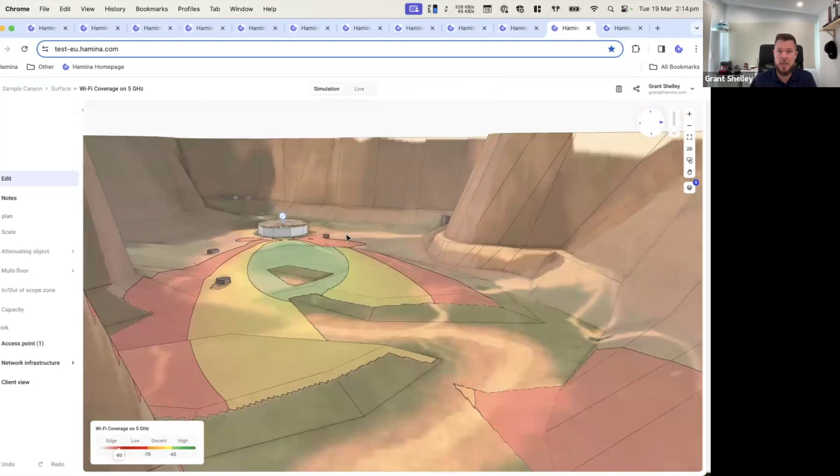It doesn't look like a whole lot, but then when you look at it in 3D, it's pretty impressive. And it's literally raised floors and sloped environments - that's literally all it is. You can sort of do stuff like that as well, which is pretty cool. So yeah, this is a more extreme case, of course, as well.

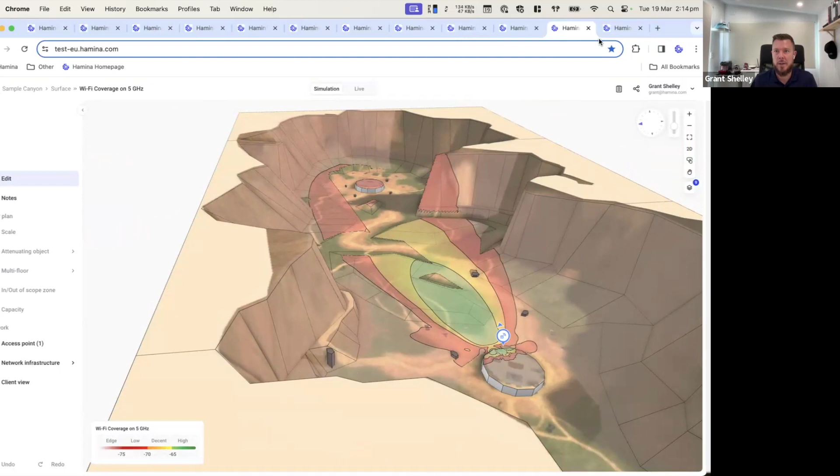And then I guess lastly, I couldn't help but show off my little Doom level, which again shows the flexibility of what I based it off. I had a 2D floor plan, and then you've got stuff like this that you can sort of create with things like stairs and transparent environments and stuff like that, which is pretty cool.

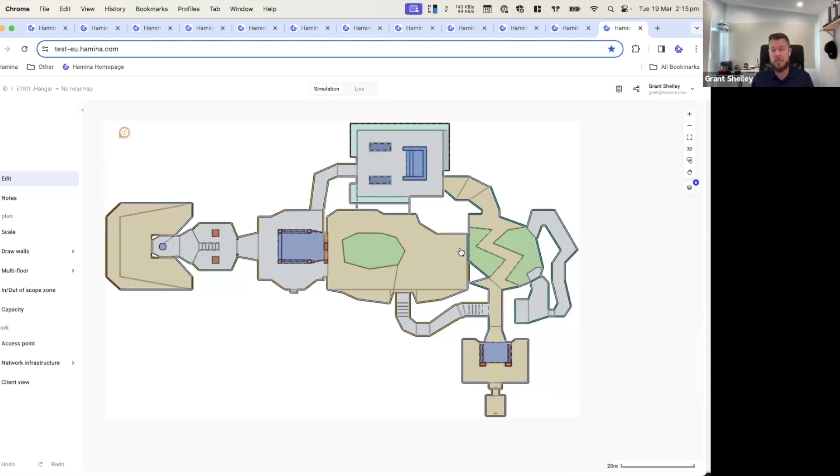So again, you look at it in 2D, yes, it's flat, but it does bring out a lot more of the detail in it. And I think, just from a design perspective, getting your head around it really helps, but also just being able to maybe educate a customer, a stakeholder, as well.

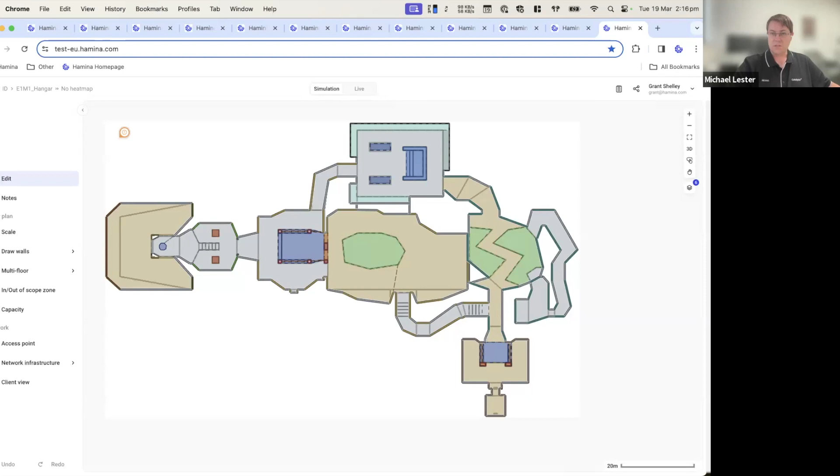I know you're not here to talk price, Grant, but what I will say is that this is very accessible, to the point where I've had people who may not have previously considered modeling this stuff out now choosing to do so, because it's something they can put into their arsenal without having to go through quite the same justification process they may have had to do before. So you would be surprised how accessible this is.

Yeah, I might just say it's like the planner price starts at like $480 USD for 6 months, which is very, very accessible.

Yeah, Haydn, any last words before we close this off? Not that I can really think of. From my experience with the tool, it's been the price point - like Michael said, it enables the ability to jump to it a lot easier at that price point, particularly for smaller companies that potentially wouldn't model something up. But then coming from a large organization and how the tool will work, that collaborative side with the design is where I see some of the big benefits, but then also the way the feedback's been taken on - this feature's missing, this is why we'd like to have it.

And then obviously other people see it and upvote. And then it's under consideration, it's been implemented, it's done. Reload your browser and it's there. It's awesome.